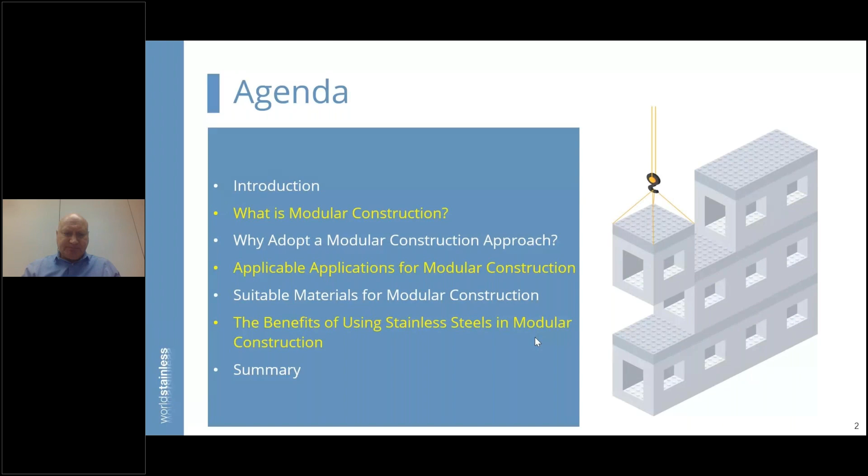So that's today's agenda. Let's start with an introduction - a few important facts. There is no doubt that when you look at the generation of GDP around the world, the bulk of that comes from towns and cities, and that's not a surprise. The fact that it's 80% might be a surprise, but not a real surprise. Equally, those same towns and cities are responsible for almost 70% of global energy consumption - again, probably not a complete surprise. And what comes with that is global greenhouse gas emissions, which is 70% at the minute.

But we have this notion of mass urbanization taking place, which has continued for some years and will continue. Currently about 56-57% of the global population live in towns and cities. That will reach 60% by 2030 and is forecast to reach almost 70% by 2050. So we understand the significance and importance of towns and cities in our global population.

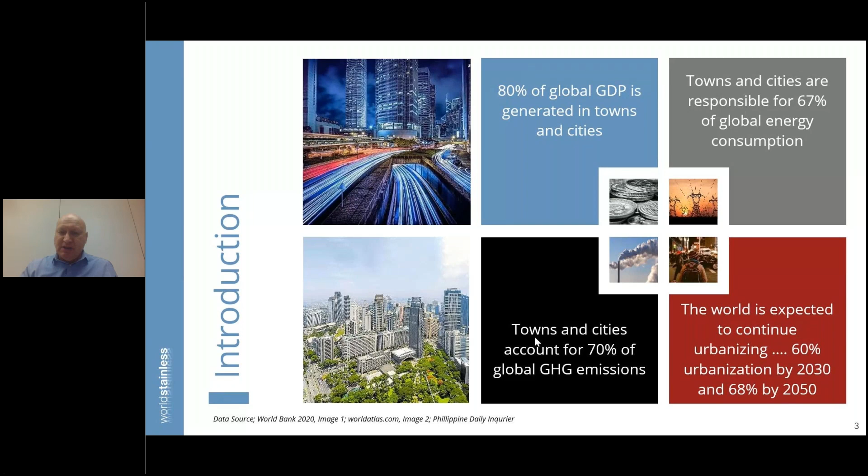Let's try and put that a little into context with some numbers. As I said, about 57% of people live in towns and cities now - that's 4.6 billion people from a total of a little over 8 billion. That is expected to increase to close to 70% in the next 26 years or so. So that 4.6 billion is expected to jump to 6.7 billion people, out of a total number close to 10 billion.

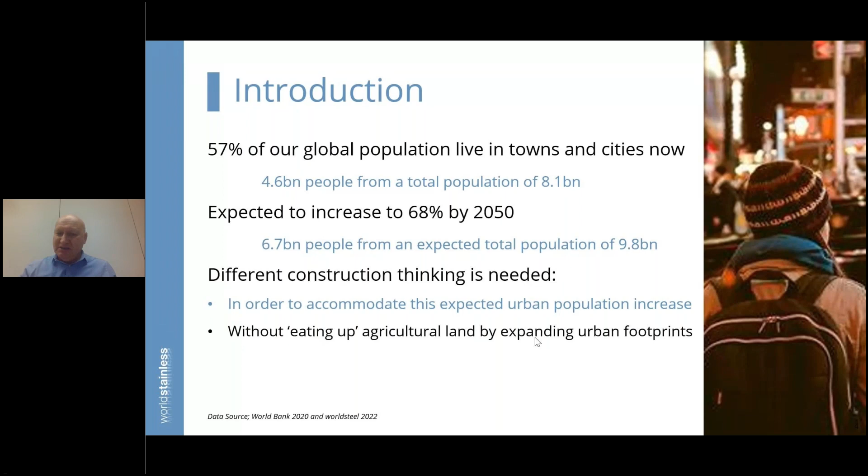So in order to deal with that, we have to, I believe, think about construction in a different way, because we have to accommodate this expected population increase, but equally we have to feed people. So it would be absolutely crazy to just eat up, to use that expression, agricultural land. So you'll have to think about not building sideways, so to speak, but building upwards, or repurposing facilities in a different way. So let's now reflect on a number of features affecting the construction industry.

Over the last 10 years or so, we've seen increasing build times. This is an example from Australia, but for many other countries the trend is the same. Whether it's units, flats, apartments, even houses, the time to build has been increasing, and the trend has continued after COVID. Behind that there are a few key reasons.

Skills shortages exist all over the world, timber shortages - that's not a complete surprise - but equally supply chain disruptions. Post-COVID we've seen more and more supply chain disruptions, and whilst we still have some big global supply chain routes in place, there's been more disruption to those routes, and we haven't yet reached the notion of regionalization in our supply chains.

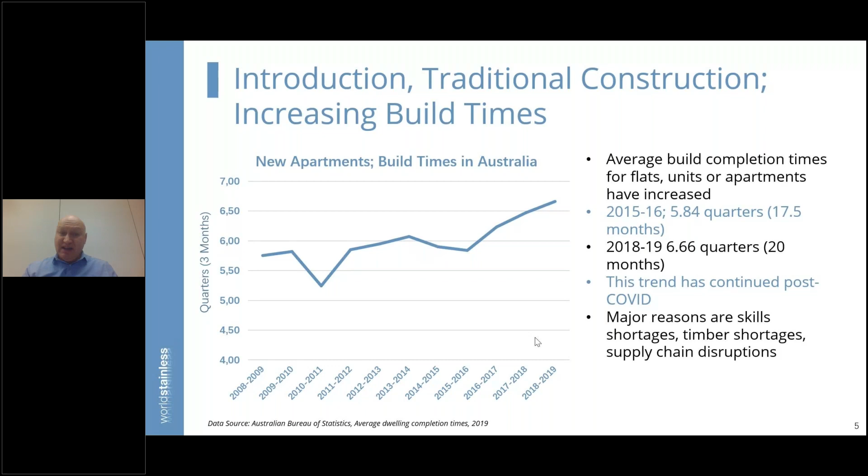A second feature is the environmental impact, which we really can't afford to overlook. Just a couple of years ago, data from 2021 showed that the building and construction industry at a global level represented around 37% of the global operational energy and process related CO2 emissions. You've got different aspects to that - the use of fossil fuels in buildings, electricity use, which is a sort of indirect emission - but you can see from the pie chart here how that 37% is built up. So there is no doubt that traditional construction approaches have a big impact on our CO2 emissions around the world.

Now what's interesting with this - an important feature - because we have a lot of discussions about reducing the emissions associated with producing materials, whether they go into domestic applications, buildings, other structures, whatever we think about. But when you consider buildings and structures, the operation of those buildings is where three quarters of the total process emissions are generated. So the material element, and this is an average figure, is only about 25%. I think we have to hold that notion in our minds - it's really important.

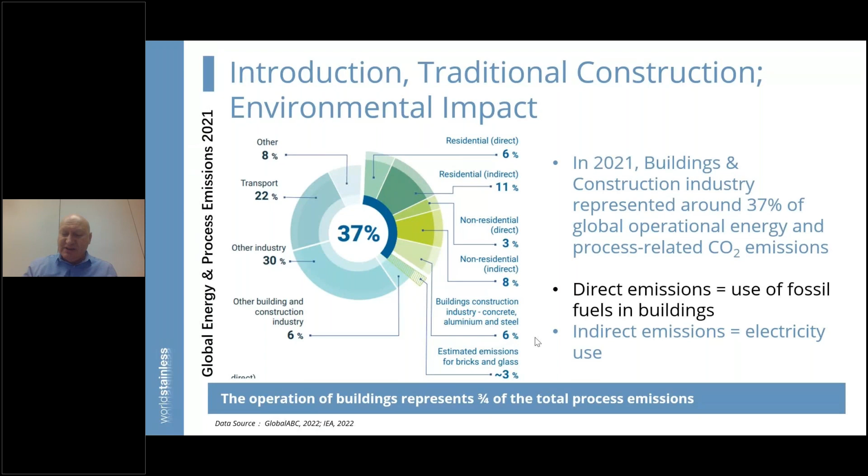Let's also look at safety. It would be wrong not to consider safety profiles, and this is looking at fatalities specifically. It's from the US, the data's a few years old, but you look at other countries and see very similar profiles. What's interesting is that when you look at fatalities, construction sits in the worst position at the top of this chart. From my background being in manufacturing, there's a staggering difference - construction delivers about three times the number of workplace fatalities compared to manufacturing.

What is very interesting within this is that the same hazards and risks sit in the top three or four reasons for fatalities in construction compared to manufacturing. So the issues are not different, they're just not handled, managed and avoided in the same way, which is a really interesting reflection. I think it shows where different industries sit on the development curve of health and safety practices and approaches.

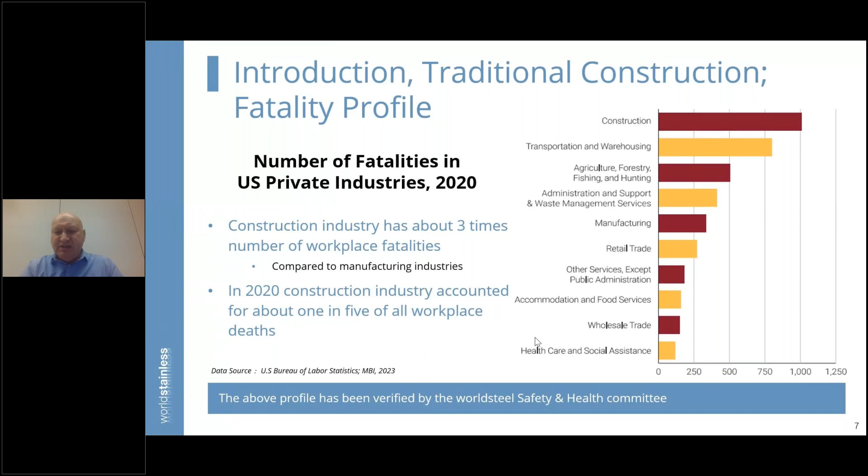Having tried to put a few things in place and highlight a few issues, to sum this first section up - there is no doubt that as mass urbanisation continues, we need a different approach to accommodate more and more people in urban settings. I would argue, and I'm hopefully going to demonstrate, that modular construction is a compelling option to consider.

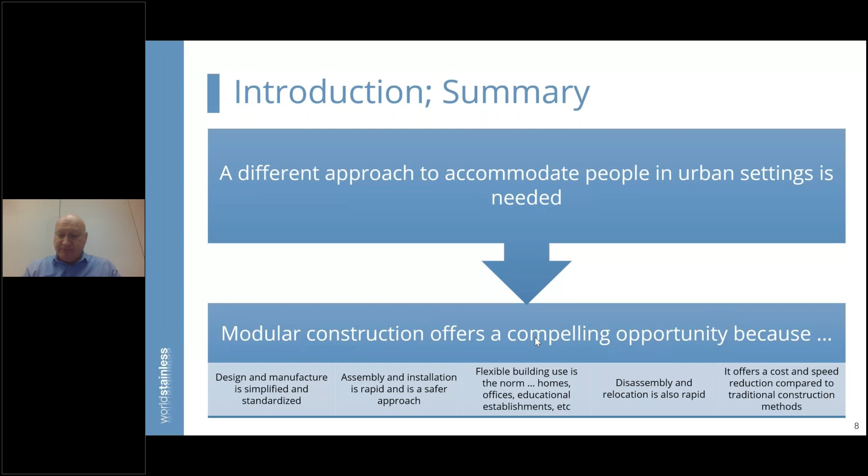Within modular construction you're simplifying design and manufacture. There is a standardization process there. The assembly and installation is rapid and much safer than traditional construction because you are taking a lot of the hazards away. But you can still have flexibility, whether it be used for homes, offices, educational establishments, medical centres, whatever. And when you choose the right materials, you can disassemble and relocate in a very efficient way. So overall you get cost and speed reductions compared to traditional construction methods. That's my introductory summary.

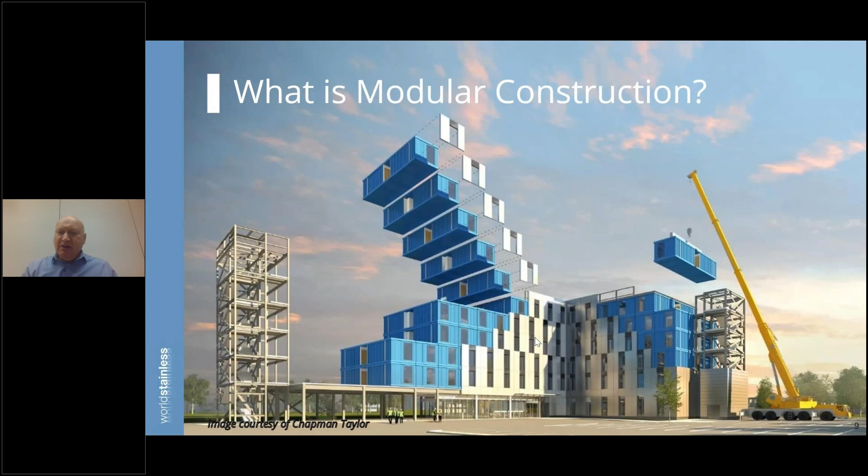I'd now like to move forward and describe a little bit about modular construction to put things into context. So what is modular construction? It's a total factory prefabricated system for buildings, and it includes four core components: the structural system, the thing that holds everything together and makes these structures safe; the peripheral protection system; the services, equipment and piping system; and the thing people often find very attractive, the interior facilities and decorative aspects of the system. Those are the four elements that make everything up.

When done correctly, modular construction is based around easily transportable prefabricated units, which are then delivered to sites for final assembly and connection. You can see in the image here an example of a tall accommodation block built from modular units, and all the verandas, balconies and windows that you can see almost as a pop-out feature are designed within these modular units, and they can just be opened out when you get to the assembly site.

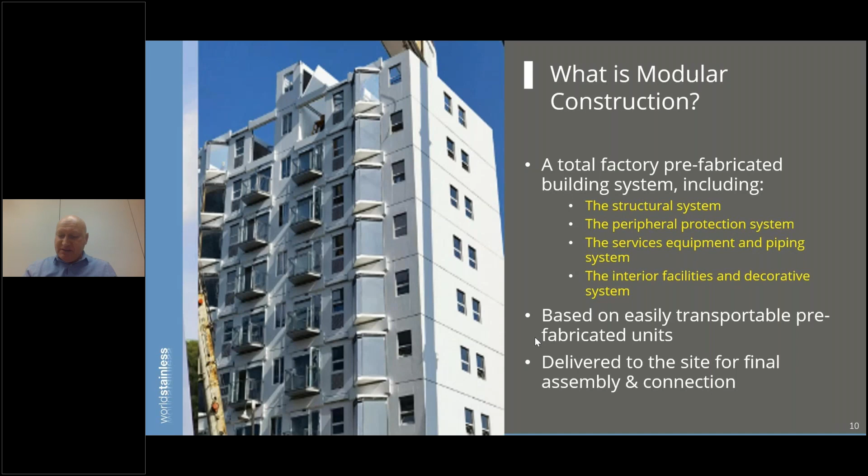Now, there are two basic approaches to modular construction. There are 3D volumetric modules. These are pre-assembled in a factory and then shipped on a truck or trailer. They tend to follow the 40-foot container profile and fit very nicely from a transportable perspective. And there are also 2D panels that are then put together on site.

And you can see at a glance the difference. One is very easy to deal with, one has a bit more assembly time. But the advantage of the 2D approach is that you can augment 3D volumetric systems with additional 2D panels and extend the whole modular concept in a more innovative way.

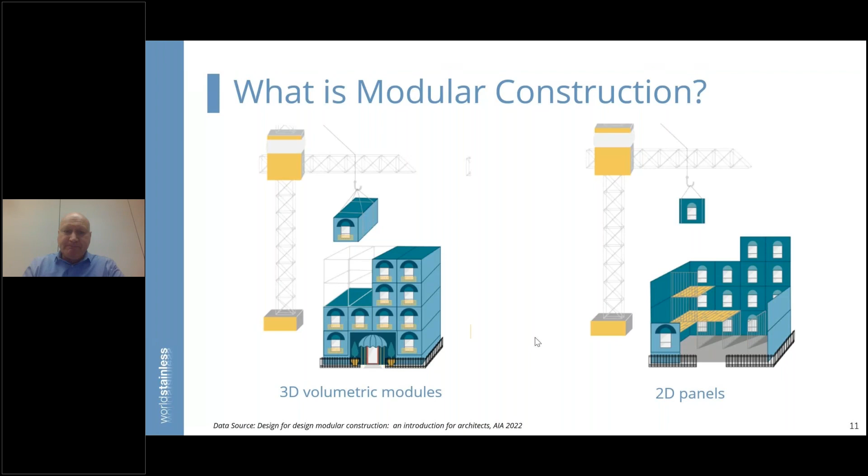Now, it's not a surprise that the 3D approach is the most popular. It's simple. Everything pretty much happens off-site. The modular units are created, and then on-site you're essentially looking at connections - putting these things together, rather like, in a very simplistic notion, putting Lego bricks together when you were a child. And you can create lots of things, whether it be apartments, hotels - there are a number of hotels now that follow this modular approach, medical centres, etc.

And the approach is suitable for both permanent and non-permanent installations, so nomadic installations. They can be there for a few years, a few months, and then moved. And as I said, the 2D panels can be used to augment the 3D system, and that gives some bespoke elements to the structure overall. So we're not just creating a McDonaldization of construction, it can be flexible.

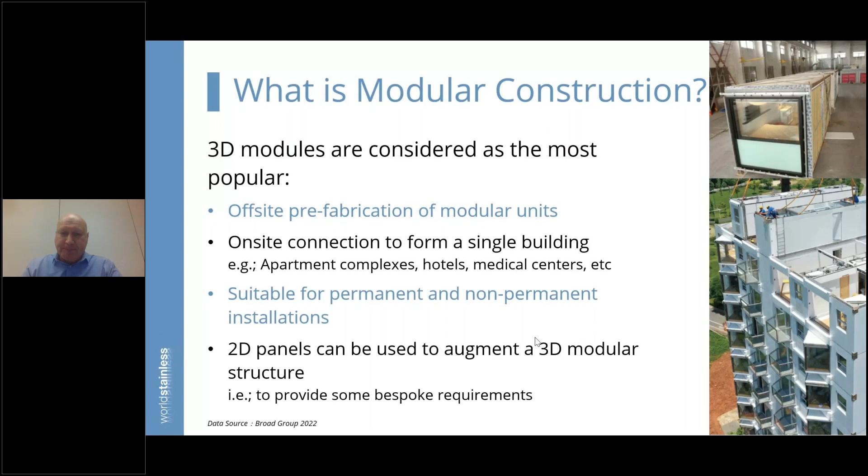Now, as I said, the 2D panels have some uses in terms of logistics and construction flexibility. The modular units themselves are simpler to transport because it's like a flat pack system in effect. And the common examples of these include frames, effectively what you call a two-dimensional frame, beams, columns, wall panels, etc.

And whilst that appears very interesting because you can create this flat pack concept, and that should in theory deliver a reduction in transport costs, you do have to remember that you've then incurred additional assembly on site, which increases costs. So it's a trade-off. I'm not saying 2D panels don't have their place, they absolutely do, but you have to balance things off when considering the total cost of the installation.

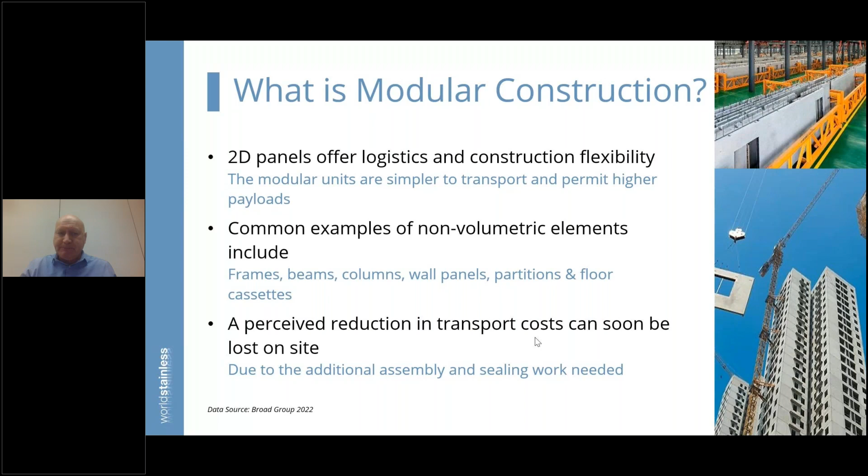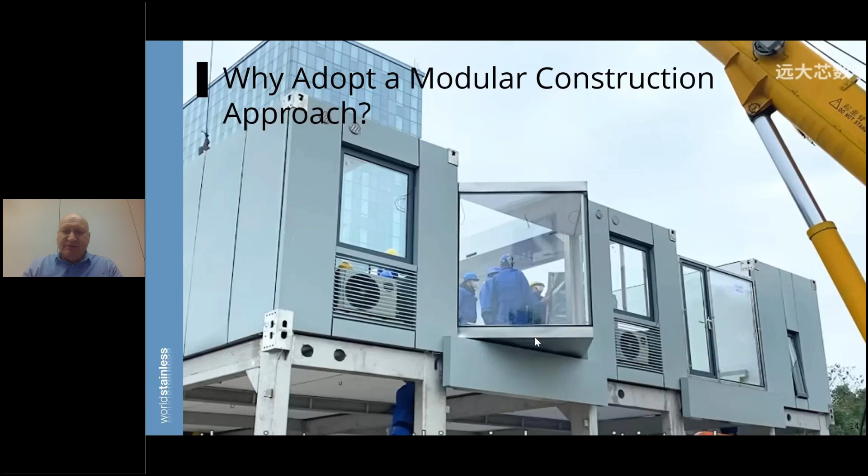So why on earth would we adopt a modular approach? We've had construction systems operating for many years, and people are very proud of that industry that's been created, and some great structures have been created.

Well, I would argue there are five business imperatives that need to be considered when thinking about why to adopt modular construction. The first is speed, and this is quite dramatic - in many cases, when you think about modular approaches, you're taking the total lead time from a number of months to a number of weeks, where that number is the same. So if it took 12 months from start to finish with traditional approaches, you can go with modular down to 12 weeks. This is a huge benefit, an interesting paradigm shift in construction approaches.

Then you've got cost. And of course, the benefits are quite variable here, depending on the complexity of the structure and how it's augmented with other features. But you will at least get a 20% cost reduction, and in many cases much more, when you compare the modular approach to traditional manufacturing. And that's even when you include more expensive materials, which I'll illustrate later in the webinar.

Then it comes to safety, and you eliminate the high risk tasks with modular. Because, as I said earlier, the same top three accident categories exist in traditional construction as in steel production, you're taking away a lot of high risk tasks, a lot of accidents, and of course fatalities that follow that profile. So from a safety perspective, it is a huge step forward.

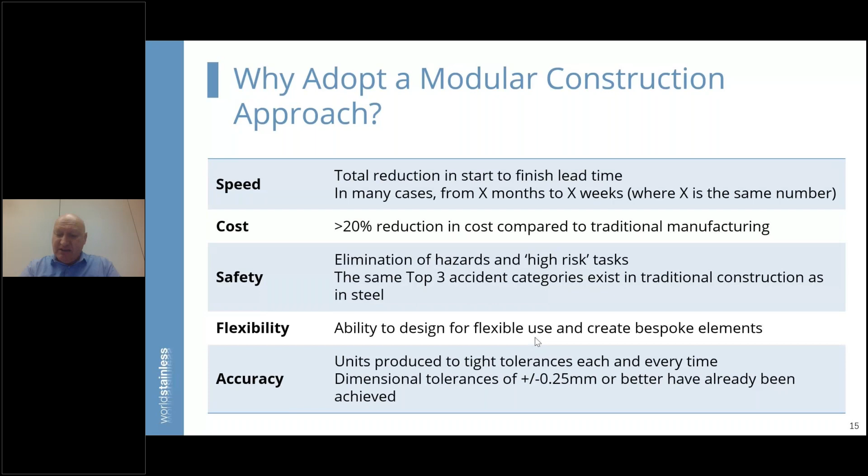Now, just thinking about this notion of why adopt modular construction: this approach supports a need for affordable housing, which is an issue discussed in many countries around the world. And because you prefabricate, it helps mitigate the labour shortages and skills shortages that have been a problem for the construction industry all across the world.

So because of this notion of prefabrication, you're eliminating a problem in the downstream supply chain. The standardized approach reduces costs, shortens lead times massively, and you get consistent quality. That's not to say that when people build traditionally they're not trying to be consistent, but if you standardize more and more things, your consistency of quality increases.

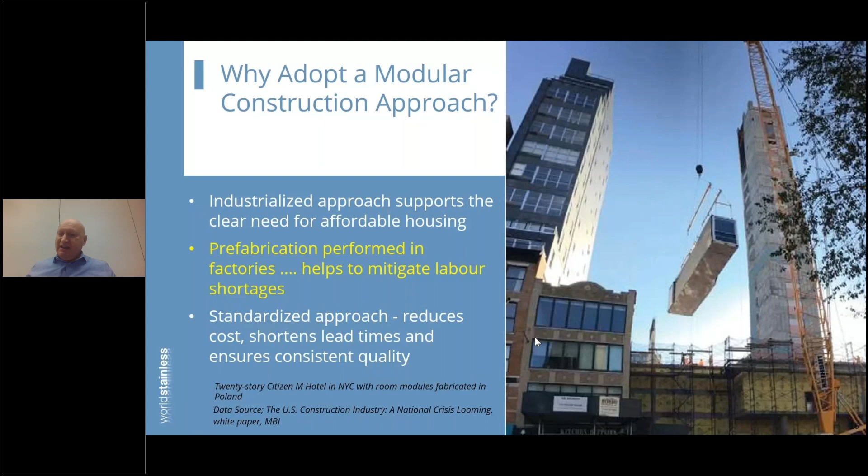So it's very easy, and I've stayed in one of these hotels. They're very modern, very functional, and very interesting as a new traveller using this sort of approach. So I can see the benefit. This will replace many traditional facilities that we probably quite like, but hey, this is not bad. This is really good.

Also thinking about it, we can't ignore the rural settings. Urban settings are where most of modular construction, I think, will move into, but because you have very good sustainable practices associated with modular construction, you can't overlook uses - probably in a simpler form - in the rural environment, because you minimize waste, reduce energy consumption, and can very easily employ eco-friendly materials in this process.

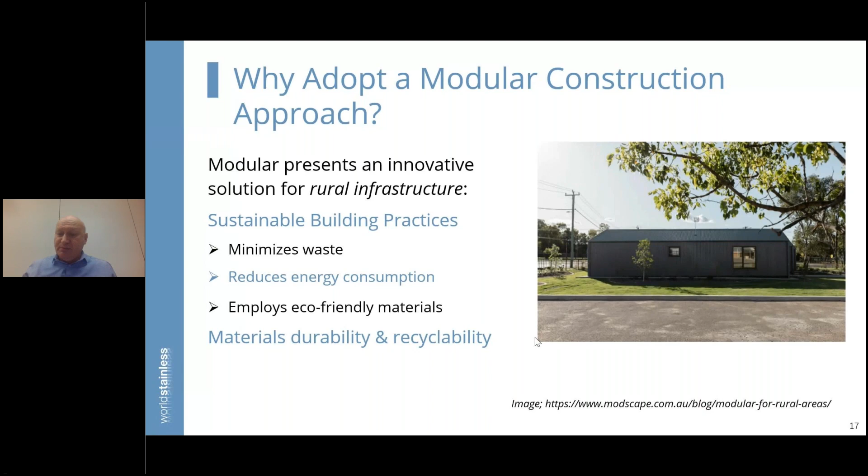Because what you tend to be using in modular construction is materials that are resilient, durable, and very easy to recycle. So you've got the notion of both reuse and recyclability wrapped up in this. So they fit well, as I said, in rural environments too.

Now, as we get to the end of this section, this is an example from the Holon building concept that has been used quite well now in China. This is an example of the bill of materials for the modular units, and what you see here - I'm not going to read this all out - is just 12 items. So this is a really important feature: the overall bill of materials becomes simplified.

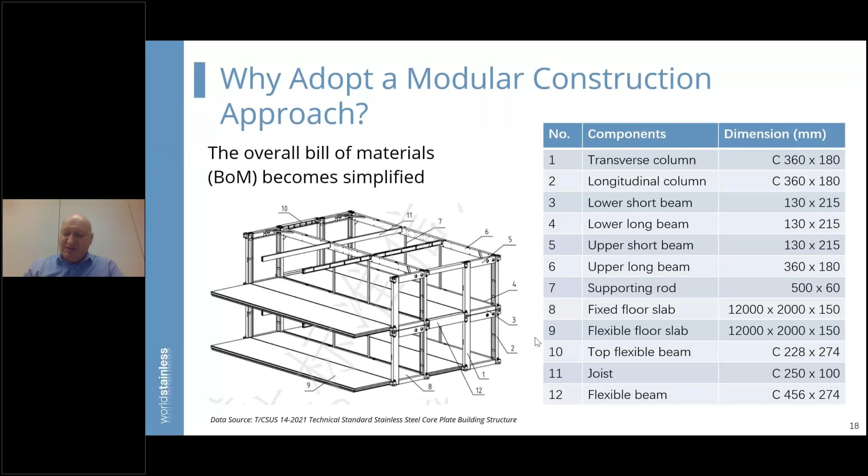You're working with standardized components, and they can be produced very quickly to order. You're not producing to stock, so your inventory holding drops too, and this is then very easy to put together. So the bill of materials aspect is really helpful when you consider the modular approach.

So to sum up why I believe modular is good: those top 5 business imperatives that I laid out early in this section are significantly improved, and I'll demonstrate that later with a couple of real world examples. The system, the approach, the notion of modular construction does overcome a number of perennial problems that the industry faces, whether that be labour shortages, supply chain disruptions, or whatever.

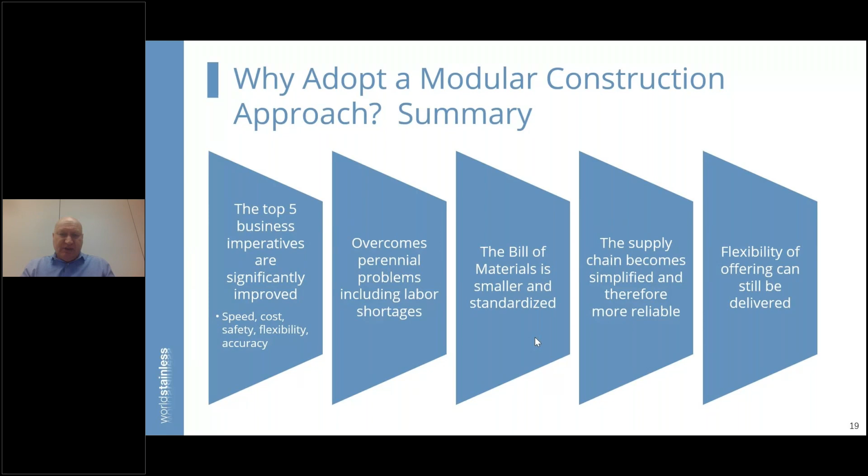As I've said, the bill of materials is smaller and standardized, which becomes very helpful. So when you put these things together, you get a supply chain that is simplified, and simplification delivers reliability - that's a well-proven feature. But you can still have flexibility, and that's an important feature because people find the requirement to have some flexibility a very personal thing. So being able to offer that is a big prize in the modular approach. That's why I believe we should adopt modular construction. But let's roll forward now and think about applicable applications for this approach.

So I'd first like to start by outlining the Holon building concept, which is something that is produced by the Broad Group. These units are put together in China and then transported. And the example here is what the Holon building people call the Garden A1 building. And you can see on the left in the photo the prefabrication that occurs in the factory. It looks very much like a car assembly line. And that's the notion of bringing the automotive thinking into construction.

So that allows just-in-time feed of components as these prefabricated units move along the assembly line. So the concept is very simple, and it's a proven concept in other industries. So why not adopt it in construction? And what's impressive about this concept is you can very quickly build a useful building. And the Broad Holon building concept has a lovely sort of tagline called 10 or 11 stories in one day, and they actually installed 11 stories in 28 hours, which is an amazing feature because it's easy to transport.

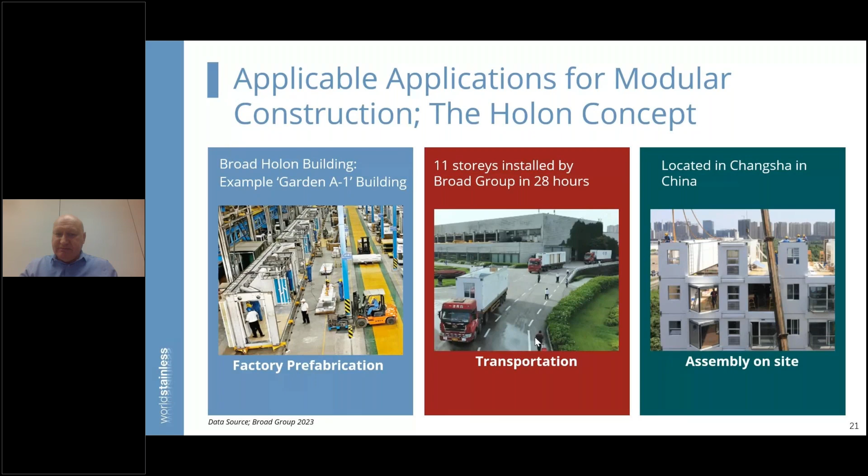You can see the modular units there on trucks in the middle image, and then the assembly is sort of dropping these things essentially side by side, one on top of another. Of course, you need to have the foundations and base in place first, but that's something that can run in parallel with the creation of the modular units. So it's a very fast system, and that's impressive. But let's look at this from a different perspective.

And this is a model of life cycle emissions, and I'm very grateful to Jan for doing all the research here and putting this together. And this is in 3 sections. If you look to the left, the first 2 bars here, you have the first year of creation of similar sized buildings, one through the Holon system, one through the traditional system, and you can see the CO2 emissions in terms of kilograms per meter squared of floor space. They're very similar, not much different. So taking that view, you'd say, is this important? Is this impressive? Is it a seismic shift? Probably not at year 1.

But as you roll time forward, when you get to year 50, then you start to see a difference emerging. The traditional building system in its operational phase is emitting more CO2, and that's because it needs more maintenance interventions than the Holon system does. And you take that forward further to 100 years and that gap opens up. So when we start to think about different approaches for construction, you have to adopt some longer term thinking as well. And then you start to see the emissions difference. And of course, that profile would continue into years beyond the 100th year.

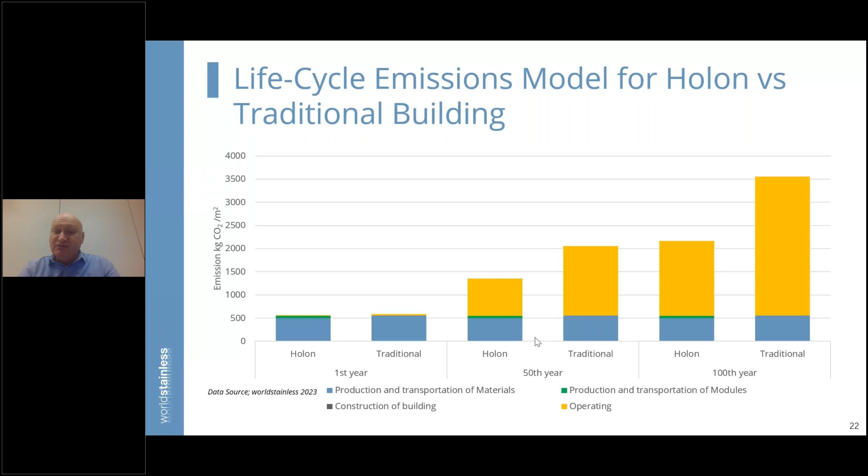And an interesting feature about the Holon building concept is the structural components are all based around stainless steel, as I'll show you in a moment. That's why you get the lower emissions, because you're using resilient materials that don't require interventions. So let's just try and sum up the Holon system. This is very simple because the prefabrication is 100% within the factory and the assembly is 100% at the site. There's no additional inputs needed. So it's been streamlined into efficient operations.

There's a complete use of stainless steels in the structural component. It's about 5 tons per modular unit. This is a 40-foot base modular unit. And when you compare another few features with traditional construction, you have very little construction waste because this is modular. It comes pretty much ready to go. The speed is fast. As I said, we're going from months to weeks. It's typically around 10 times faster. And the cost is at least 20% lower, even with more expensive materials like stainless steels, and in some cases up to 50% lower. So you get a lot of benefits through this thinking.

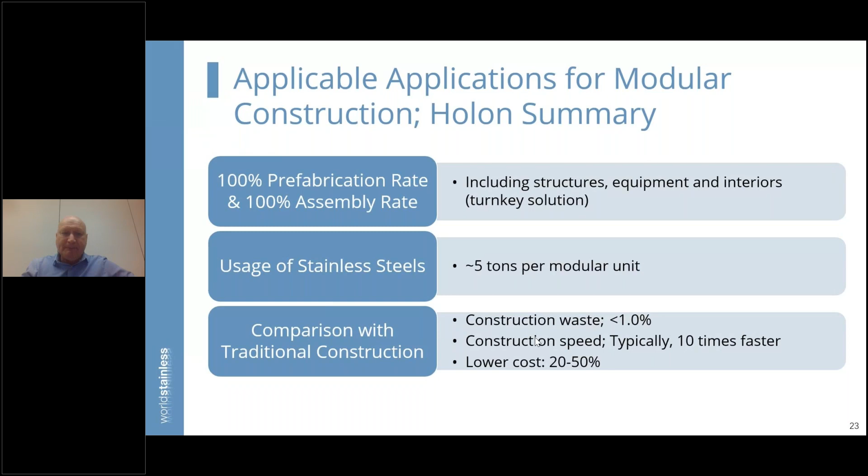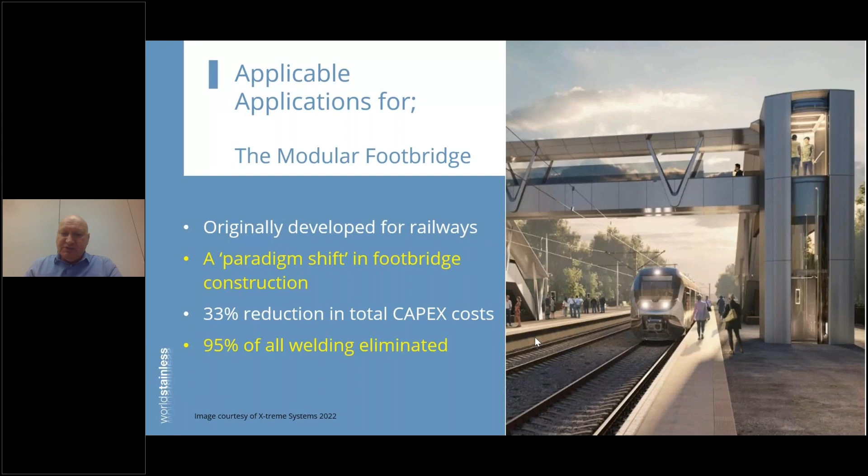I'd now like to move on and give another illustration. This is a modular footbridge that was originally developed for railways, and this is absolutely a paradigm shift in footbridge construction. Again, stainless steels are used in this, and even with stainless steels, you get about a 33% reduction in total capex costs and an elimination of almost all the welding. So this is a very interesting system. It's also produced from readily available stainless steel components. So let's look at it.

So it's primarily constructed from a lean duplex stainless steel. And for a bridge that spans 2 rail tracks, which is fairly common, you need about 65 tons of a lean duplex stainless steel. The lead time is reduced. When you're dealing with railways, you've always got complications of taking possessions of track work and things like that. So the lead time is reduced from more than 9 months to somewhere between 9 to 12 weeks. And that's start to finish, from placing the order to installation.

The operational life is doubled to more than 100 years with minimal in-service maintenance. And standard stainless flat products, plate products, between 6 and 15 millimeters thick is what's needed for the bill of materials. These are all cut out and the forming of them into structural components is fully automated. So it's a very simple to produce system. And the fixings are all a standard 316L austenitic stainless A4 structural bolt. So nothing complicated in the bill of materials here at all.

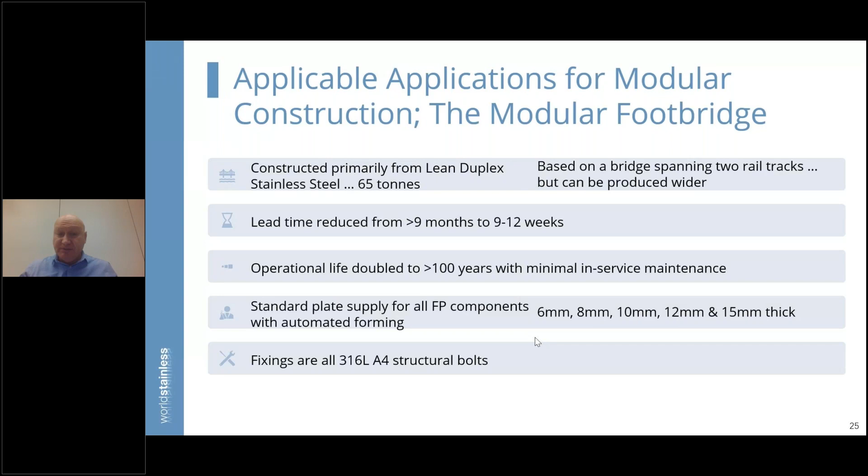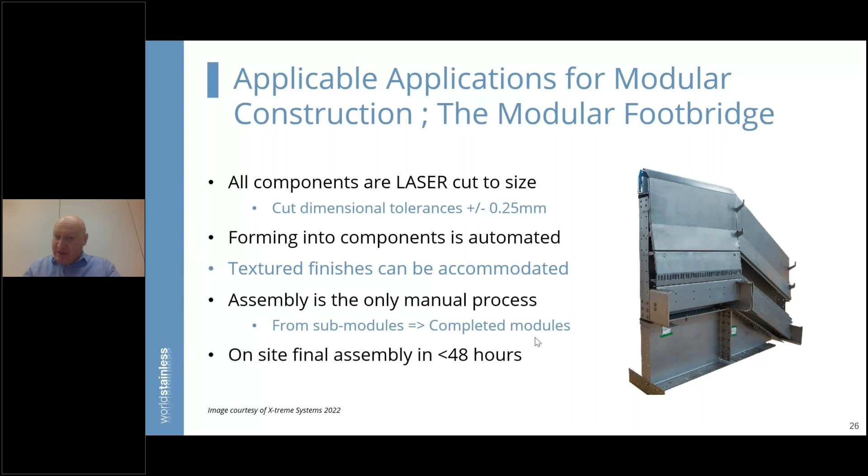So I would argue that this approach is a game changer when it comes to footbridges, and it doesn't have to just apply to railways. As I said, it's produced from standard stainless flat products which are readily available. The capex cost is much lower. Almost all the welding is eliminated.

You reduce, in the case of railways, the line access permissions and isolations that are needed, and the total lead time is slashed. And this is a regular feature of the modular approach, that you're really reducing the lead time. So if we need to move fast to do things, when we have a big disaster, this is all possible with this system.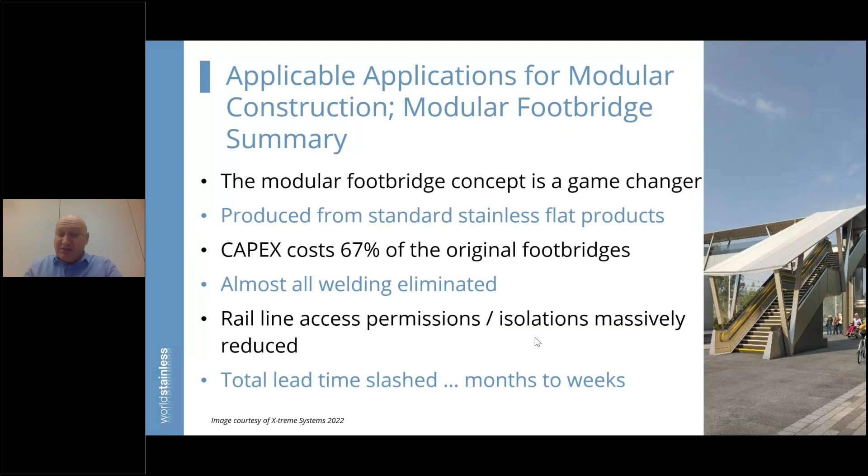So when I think about these applications for modular construction, and I've only illustrated 2 here, there is no doubt that modular permits a large degree of novel thinking. You can choose higher cost resilient materials to replace traditional choices and still get lower costs for the project overall. And using those resilient materials gives a massive reduction in costly maintenance demands.

And if you think about something like railways, even to undertake maintenance, you've got to isolate and get access permissions around the track work. So you're adding complexity that with this system and the right choice of materials, you avoid. And also those resilient materials reduce life cycle emissions. And with this approach, you can have fast response, you can have flexibility. So if we have a natural disaster, you can offer up quite quickly modular support units.

You can offer up facilities that can be converted into short-term need hospitals, like the pandemic we've just come through, or perhaps in some cases we still have a number of people suffering. But you can be so flexible with this approach, and you can move these things around, as I said earlier in the presentation.

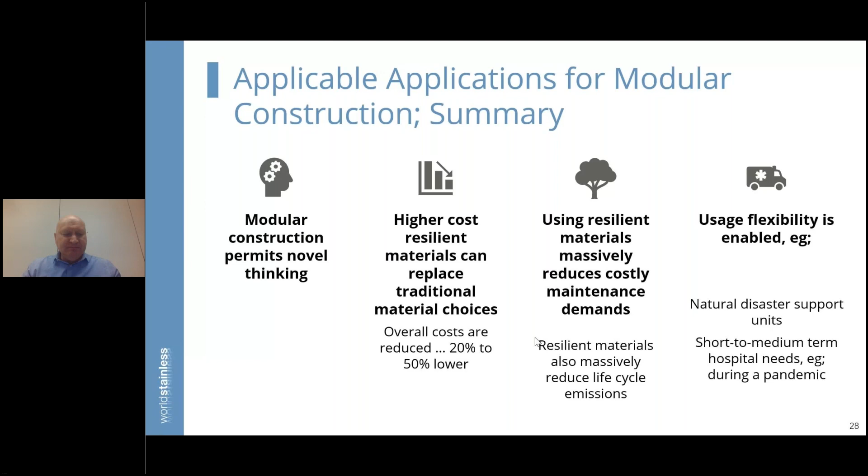So let's move forward and think about suitable materials. I know the examples I've talked about already use a high proportion of stainless steels, and that shouldn't be a surprise to the audience here. But if you look at modular construction and break the units down into these 4 component parts of structures, the enclosure itself, the equipment that goes in, and the interior decor, etc.,

then when you look at the big consuming elements of that, structures and the enclosures, you're probably going to consider in the main 3 materials: wood, concrete and steels. And in the steels group, you've got carbon, traditional structural steels and stainless steels. And that shouldn't be a surprise. And that's where most of the weight in a modular unit sits. So we don't need to pay much attention to the equipment and the interior decor.

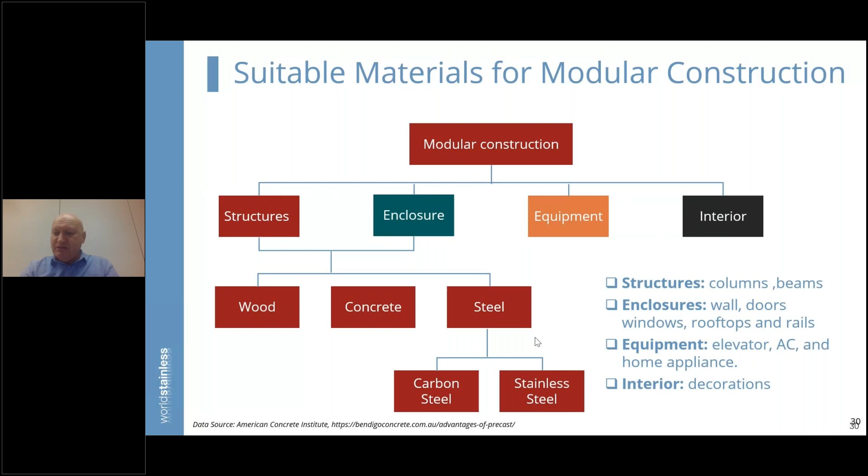So from an attributes perspective, you can see how we should perhaps consider materials thinking. Now, of course, when people talk about stainless steel, they say, hey, it's expensive. Yes, it is. But when you think about the operating life, stainless is probably one of the better options you could consider because it doesn't require maintenance and ongoing treatments like other materials do. So the cost dimension is really interesting when you start to think about these materials.

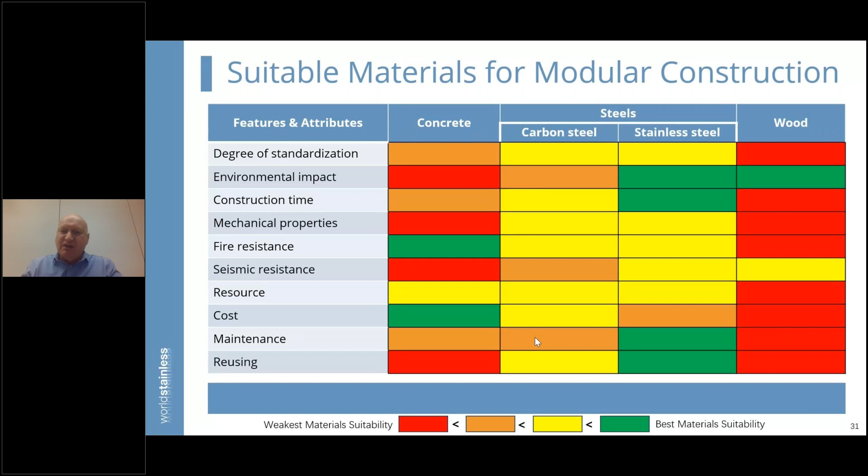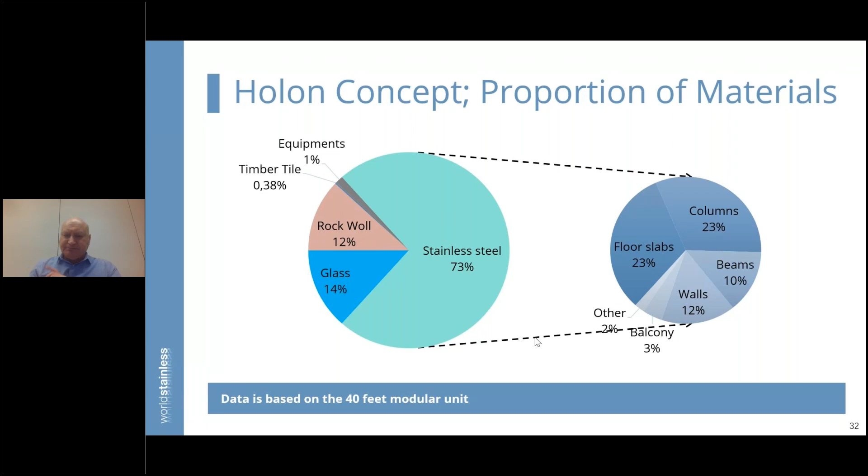Now let's just reflect on choice of materials now by looking at the Holon concept and the modular bridge concept. And in the Holon concept, almost 3/4 of the material usage is stainless steel, which might surprise people. And when you look at where that stainless steel goes, it's primarily in the structural components. There's a few additional features around the balconies and other decorative elements, but pretty much all of it is going into the structural components. So it's a heavy alignment to stainless steel. And I'll explain more about that shortly.

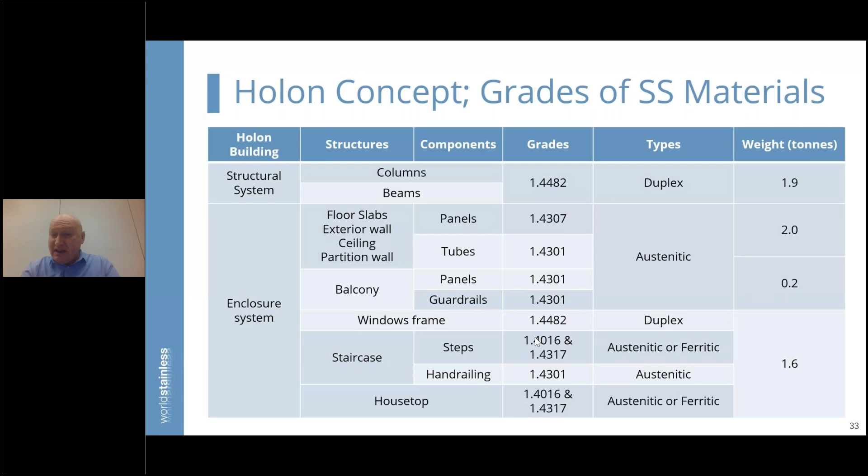If we then compare that with the modular bridge, which has often been termed the AVA bridge because of the way the components look, they look like the letters A and V when stood side by side, then pretty much all of this is stainless steel. There's very little other materials, notably glass and a few other materials used. But stainless plate for the bulk of the structure and stainless fixings, as I mentioned earlier, are the lion's share by a long, long way.

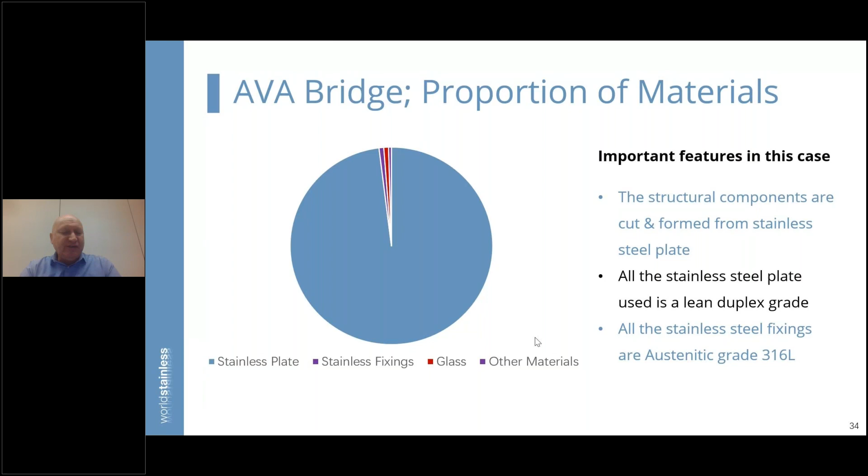And what's important is the choice of a duplex stainless steel for the structural components because you get this very high strength, much higher than traditional structural steels, and you get all the benefits of a lovely surface finish, corrosion resistance, minimal maintenance.

So if we think about suitable materials, I would argue that stainless steels are a smart choice for modular construction because when you're thinking about structural components, duplex stainless steels are a perfect fit. High strength, good corrosion resistance, relatively easy to work with. And those resilient attributes tolerate what I call a construct, deconstruct, construct cycle. You can put something up, you can take it down, you can put it up again, and it's just the same. And whilst it is much higher in cost, it's very much offset completely and more by reduced maintenance needs, which will be minimal, and very much reduced manpower costs.

But also we need to think about stainless steels from a life cycle perspective, because when you choose stainless, yes, you invest a bit more up front, but life cycle costs are always significantly lower because you need less interventions. You need less maintenance. So that's much better overall. It's a fit and forget type solution. And the life cycle emissions, as we showed with the Holon building, are also massively reduced. Resilient materials don't need to be cared for in the same way. You need to select the right resilient materials at the start and then allow them to do their job.

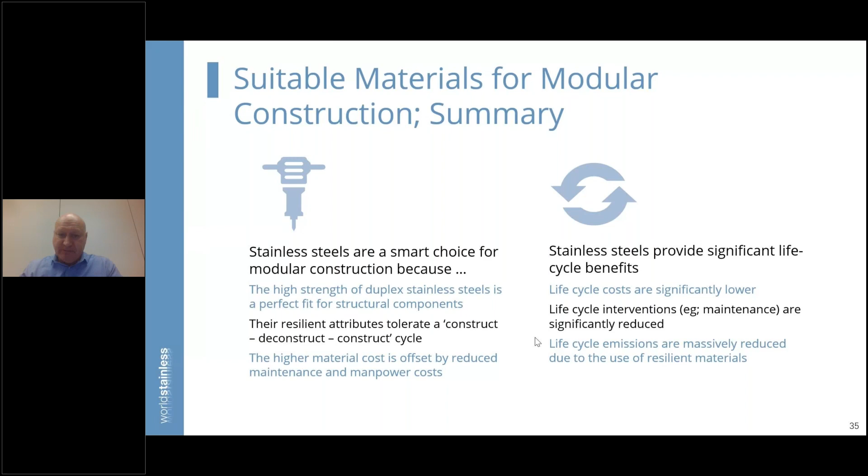So let's touch on, as we come to the end of this, what are the benefits of using stainless steels in modular construction? And I've touched on some of these things before. Significant cost reduction. In many cases, you will get a reduced capex cost. The bridge is a great example there. In all cases, you'll get a reduced life cycle cost because you're avoiding operational problems and maintenance. You get a long service life. You will get 100 years plus comfortably using stainless steels. And that's including the times you build, deconstruct and rebuild. And you can reuse and relocate very easily.

These things do essentially do what they say on the tin. You can repurpose, relocate. Concrete structures are more difficult to relocate, and they do degrade, particularly in urban and coastal settings. Traditional structural steel units, whilst very easy to repurpose and relocate, do degrade over time.

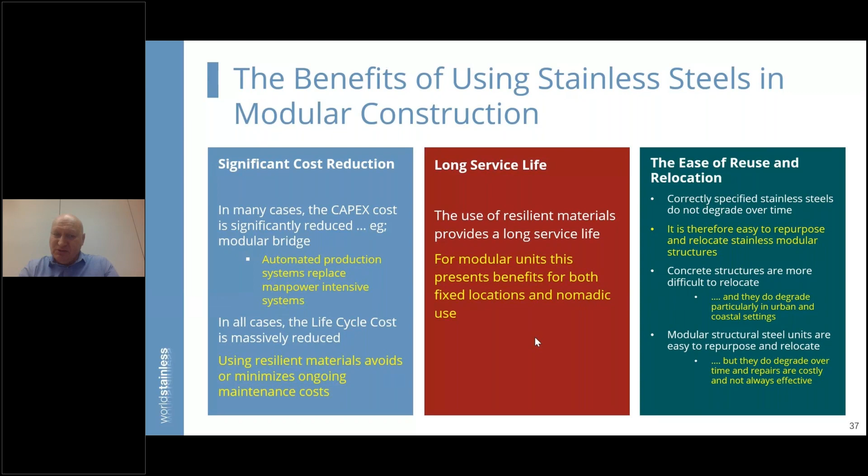So you're attracting a maintenance need. Concrete structures are very effective, but again, they degrade over time, particularly if you've got chlorides in the atmosphere, CO2 in the atmosphere, and sulfate ions, which cause concrete to spall and crack. What's interesting is when you think about repairing these things - because they're absolutely repairable - 60% of repairs, particularly to concrete structures, fail within 10 years of the repair being completed.

So you're already choosing a route that is likely to be doomed to failure. Whereas stainless steels, because they're corrosion resistant, don't degrade in the same way. You don't have the same problems, so you can reuse and relocate in a very simple and straightforward way.

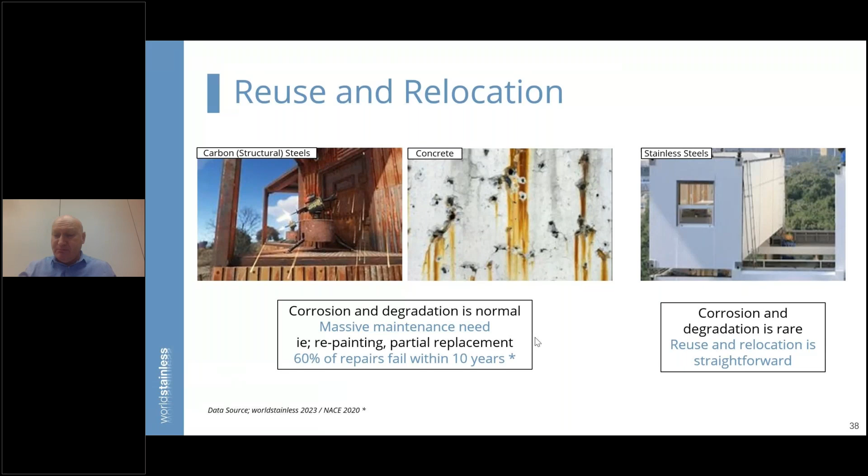Now, also, as we touched on earlier, there's a low emissions profile. If you choose materials that do not degrade over time, you attract a low emissions profile naturally, because it's the interventions that cause the higher emissions. Non-resilient materials degrade over time, even if you try and put protective coatings on. There are some great examples of structures around the world that have to be constantly painted to avoid degradation and corrosion, and that comes at a higher cost and an increasing emissions profile.

Maintenance interventions are the things that add to the emissions profile, and I think we should all be thinking about how to have minimal maintenance. It's not about cutting back on maintenance - it's about choosing materials that avoid or minimize maintenance, because 60 to 80% of emissions associated with structures are in that operational phase. So let's do something about that.

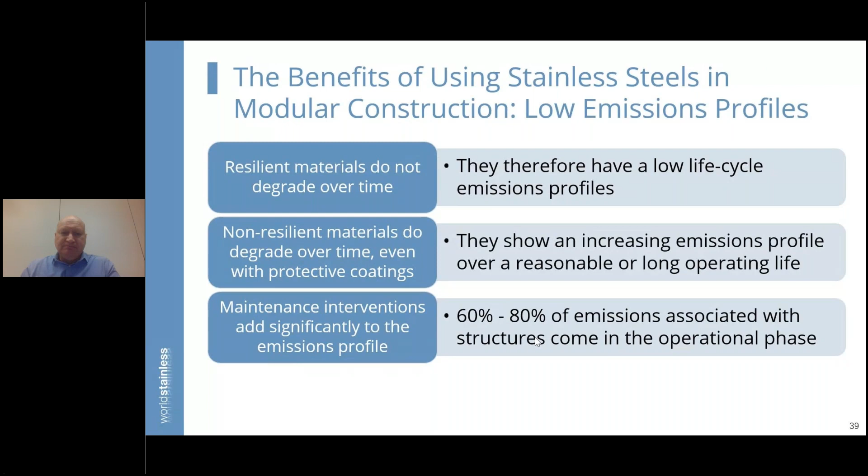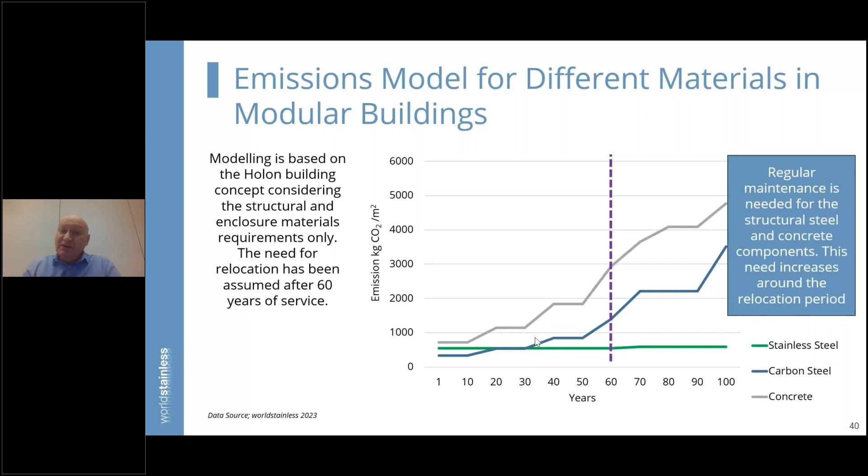So when we think about material choices, we have to think about not the first few years, but the operating lifetime. I think it should be imposed on us as a requirement to make structures last for at least 125 years, not just for the foreseeable future. And I think we should also recognize that if we live twice as long as we do today, would we think differently about our material choices?

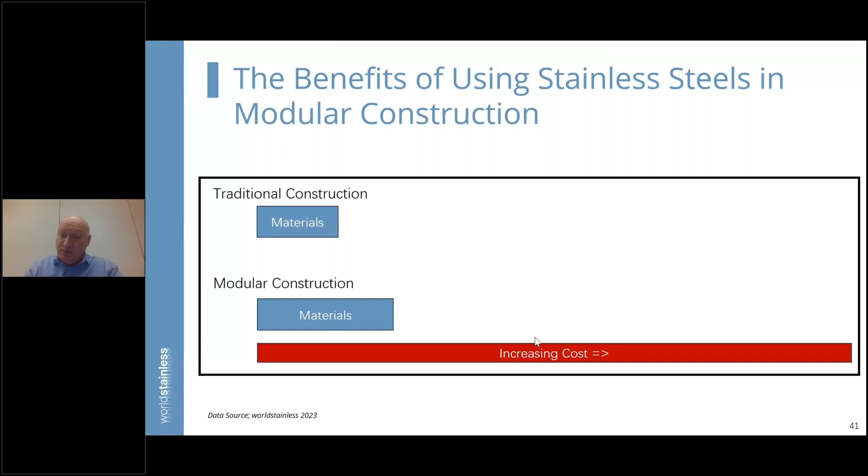So let's now look at the benefits of using stainless steel in modular construction. I'm going to put together a little diagram here that has increasing cost from the left-hand side across to the right, and we'll put traditional and modular construction side by side. So let's start with materials. When you have traditional construction, your materials are undoubtedly going to be cheaper. When you've got modular construction, particularly with stainless in mind, it's much more expensive - and this is often what puts people off, this upfront material cost.

Then you get to fabrication and manpower. There's more needed for traditional construction compared to modular, but at this stage, modular still looks more expensive, although the gap is now starting to close.

When you get to the delivery component, with traditional construction, you've got such a huge bill of materials that you have significant delivery costs. With modular, everything's been condensed - you've got a much smaller bill of materials, so you have lower delivery costs. And now the outcome is coming close to being on a par with each other.

Installation and manpower, modular is much, much simpler and faster. So of course, now the cost difference starts to open up. And then when you get to maintenance, for modular it's very small, very limited, but for traditional it's ongoing. So it's in these latter two stages, the installation and manpower costs at the point of installation, and the maintenance costs, where the difference opens up.

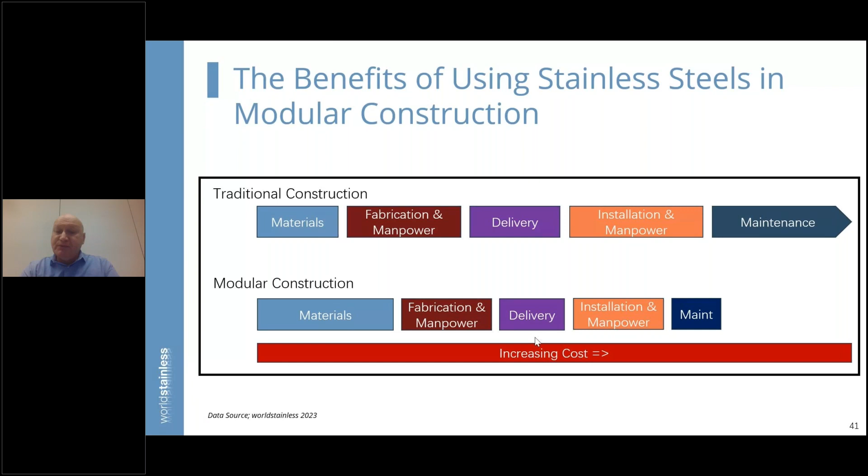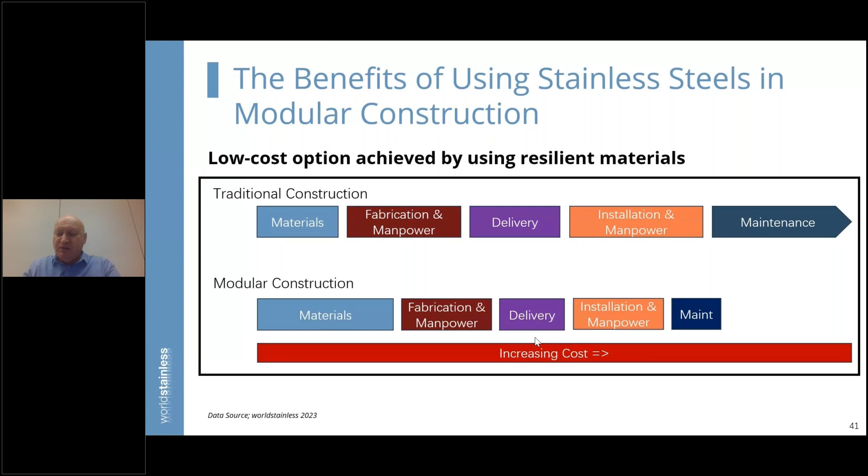So this is a very interesting reflection, just from a simple cost analysis, that we have to think beyond that upfront cost and start to think in terms of whole of life costs and whole of life benefits. So the low cost option is always achieved, I would argue, by using resilient materials, because you get those benefits over the long term. So I'd now like to sort of sum up before going to questions.

Three slides to sum up. Modular construction is growing in popularity. But what's worrying is that many countries, whilst they understand that modular construction is useful, do not have strategies or policies for resilient construction. And that's particularly important when you consider extreme weather, which we're seeing in all parts of the world today.

As I've said, modular construction offers many benefits. You can use highly resilient materials effectively and still deliver cost reductions. You can standardize and simplify the bill of materials. You can produce things and install things quickly from readily available products in the supply chain, and you can still customize and repurpose structures easily.

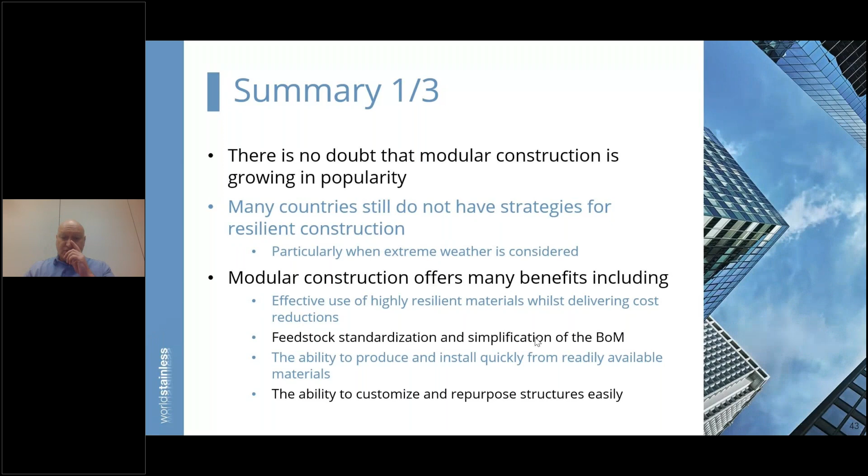Now, I've said this a few times, but stainless steels are often overlooked for construction use because people say, hey, they're expensive, can't afford this. Or people equally don't know about the structural grades that are available. And yet, there are lots of examples where stainless steels have been used and the results are stunning.

The Chrysler Building in the USA is more than 90 years old now. It's only been cleaned 3 times, I believe, with normal household detergent, and still looks pristine. Bush Lane House in the UK, in London, is approaching 50 years old, built in 1976. This was built with partial use of duplex stainless structural components. They're in perfect condition, no maintenance needed.

So we have some great examples, but we need to think from a modular perspective that we've got a family of materials that would help us. We have specifications and standards available that make the selection of stainless steels much more straightforward than it was in the past. And I'd like to leave people, before I move to the final slide, with a thought.

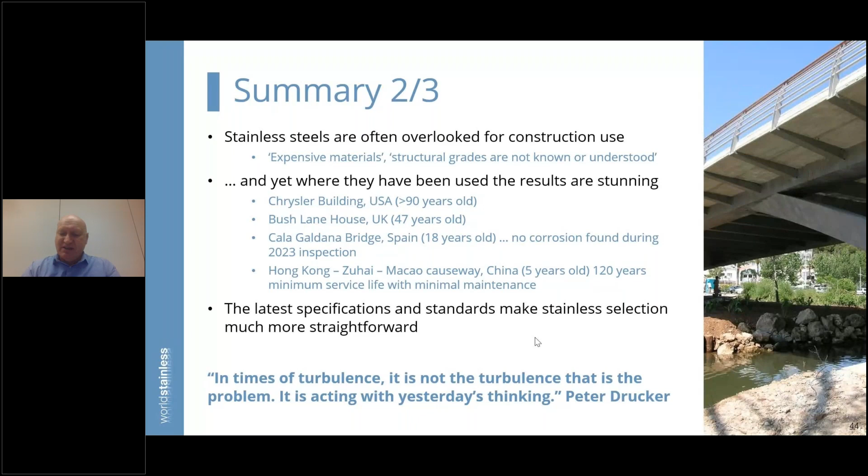We often experience turbulent times, as we are doing now. And in times of turbulence, it's not the turbulence that is the problem - it is acting with yesterday's thinking. And Peter Drucker, who was a great management guru, is sort of assigned to that statement. I think it's very valid today and well into the future.

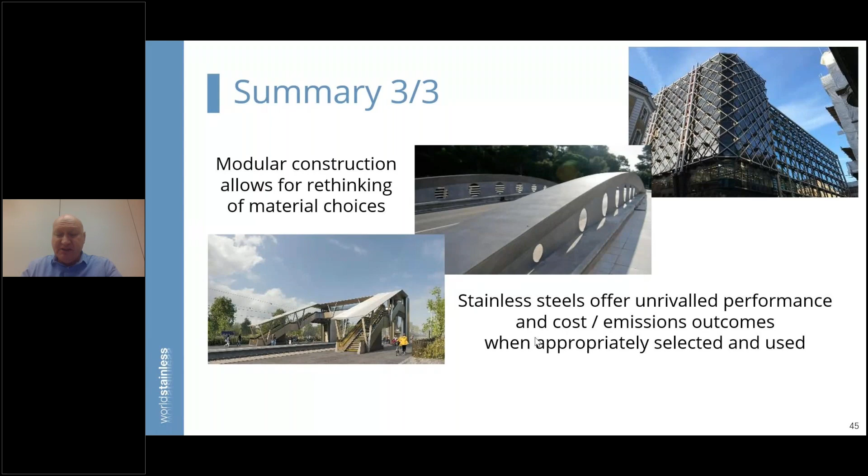So, to close this: modular construction allows for a rethinking of material choices, and I really think we need to do that. Stainless steels offer unrivaled performance when it comes to cost and emission outcomes, but it is all about appropriate selection of the type of stainless. There are more than 200 different stainless steels available, so you have to choose the right stainless for the right use, and then you get this near perfect performance.